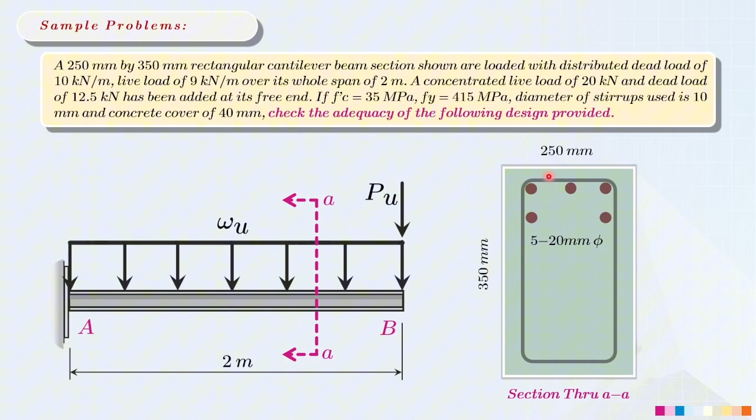First, let's look at the geometry of our reinforcements. As you can see here, the arrangement for our reinforcement is at the top. Usually, from our previous sample problems, it's at the bottom, because we know that when we place loading on top of, say, a simply supported beam, at the midspan the top fiber experiences compression and the bottom experiences tension. So wherever the tension is, that's where our main reinforcement should be located. However, in this sample problem, the interpretation will be different since we are given a cantilever beam. Let me explain why it's at the top.

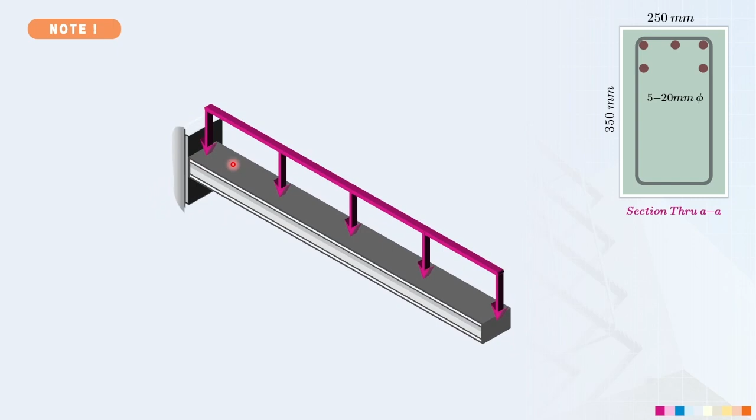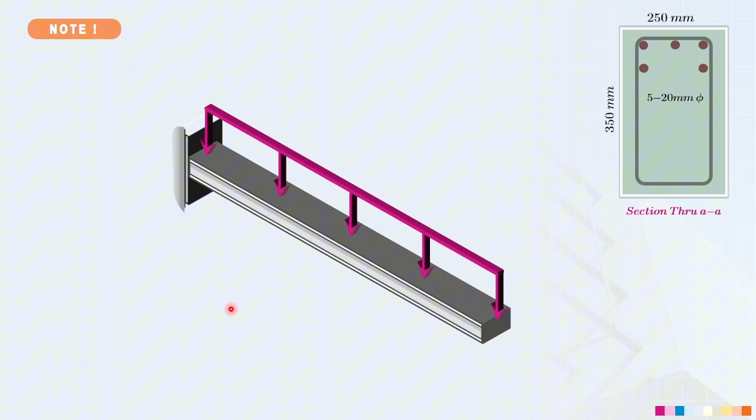Typically, when a cantilever beam is subjected to a uniform load or any kind of load, what happens is that its only support is a fixed support. This means in terms of deflection, it can bend downwards. If it bends downwards, the location of our two stresses, compression and tension, changes. Instead of tension being at the bottom, as typically seen in a simply supported beam, in a cantilever beam it's reversed. The tension is at the top. This means the top fiber is being stretched.

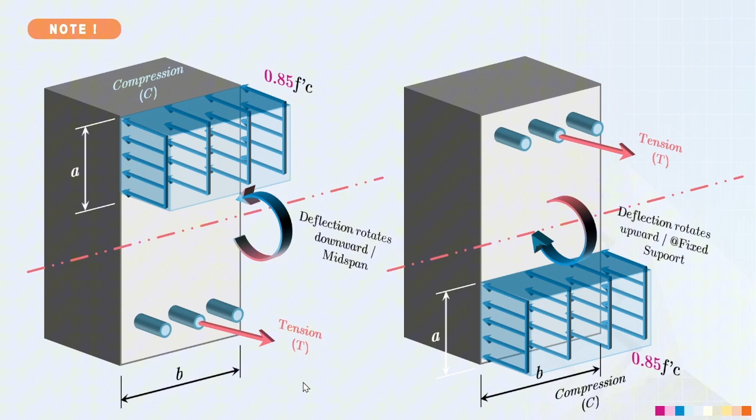Let's proceed with part 1, which is the beam section capacity. We need to get two moments here: the moment coming from the section and the moment coming from the beam. Let's go through the preliminary steps - same as before, we need to determine the effective depth. Since the arrangement of our reinforcement is not symmetrical, we can use Varignon's theorem. Using Varignon's theorem, it's the same principle, but our total number of reinforcements here is 5.

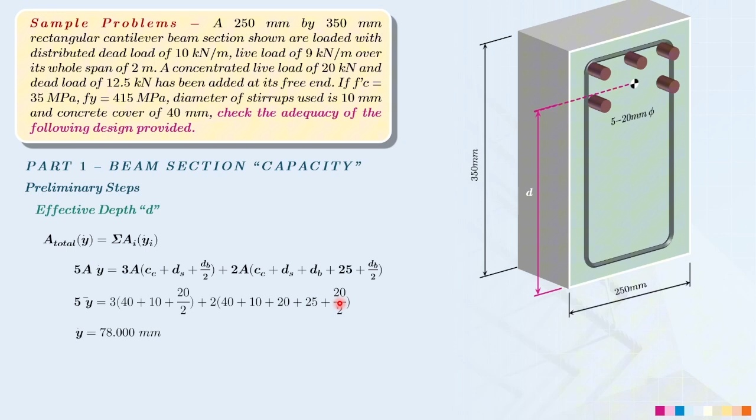So we get the location of the centroid for our main reinforcement as 78 millimeters. Subtracting from our 350 millimeters, the effective depth we get is 272 millimeters.

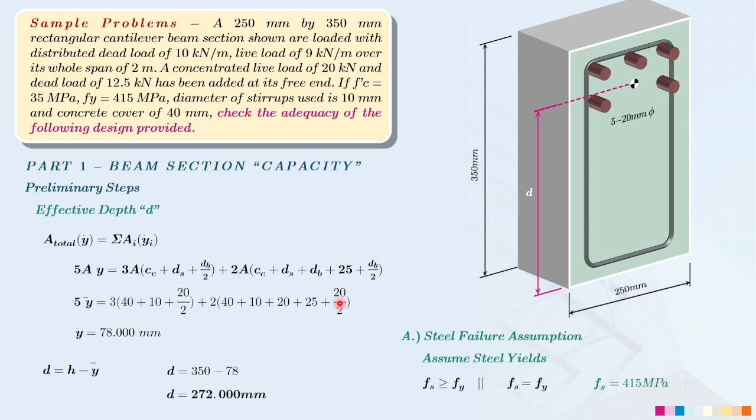So let's proceed with our first step. Our first step here is we need to assume the failure of our steel - assume that steel will yield. This means the stress of our steel is now equal to our yielding strength, which is equal to 415 megapascal. So emphasis here is on our stress diagram.

By determining our beta 1, or the stress block factor, since our f prime c is now equal to 35 megapascal, it falls under the second condition, where the value of f prime c is between 28 megapascal and 55 megapascal. So you will use this formula.

To determine our beta 1, we need to substitute f prime c as 35 megapascal in this formula. So this is 0.85 minus 0.05 multiplied by 35 minus 28 over 7. So our beta 1 is now equal to 0.8.

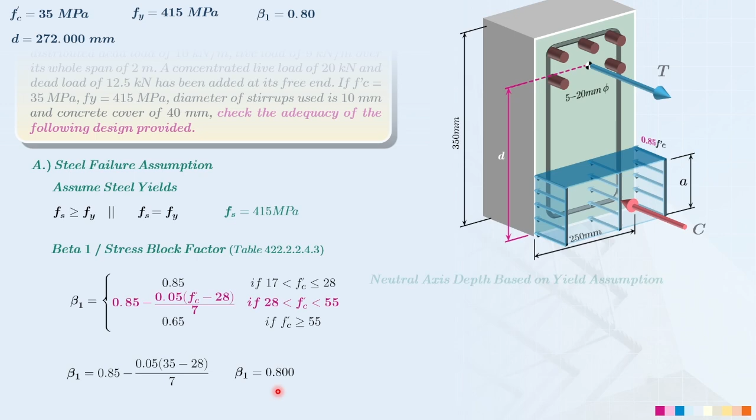Let's now determine the neutral axis depth based on our yield assumption, which is the emphasis of the equilibrium compatibility. Presenting here this equation, and also the formula for the depth of the rectangular stress block. Substitute back into our equilibrium compatibility and substitute all of the values. So the value for our neutral axis depth is now equal to 109.56 millimeters.

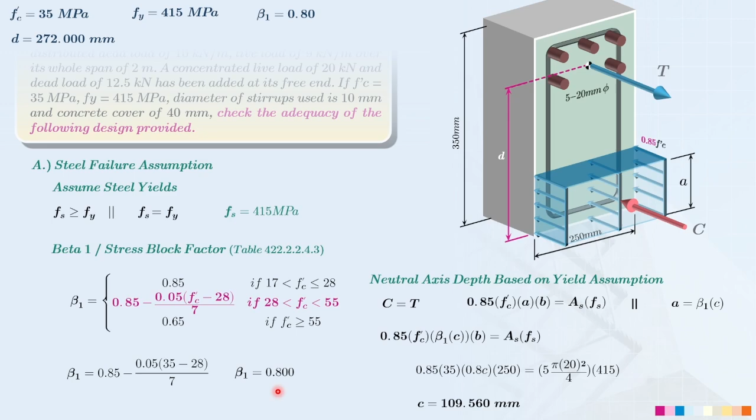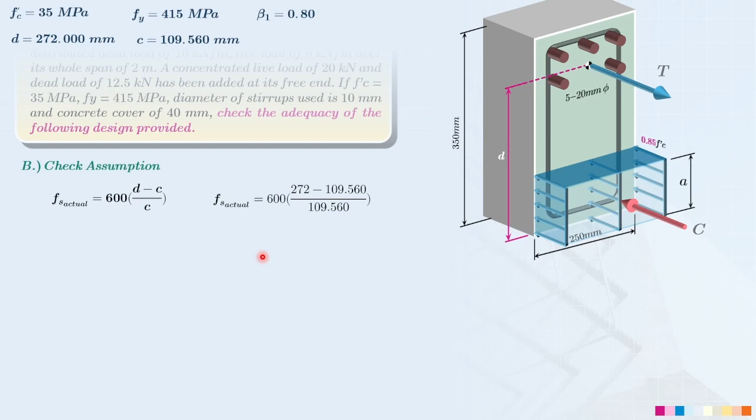Since we already got our value of c, we need to check our assumption - is it legitimate that our actual stress in steel did yield? Let's substitute according to this formula. So our value for the actual stress of our steel reinforcement is now 889.558 megapascal. Comparing with our yield strength, which is 415 megapascal, this concludes that steel yields.

So the next thing we need to do is determine the equivalent rectangular stress block using this formula. So our value of c, which is 109.56, multiplied by our beta 1, which is 0.8. So our depth of rectangular stress block is now equal to 87.648 millimeters.

After that, let's proceed to our third step, which is we need to determine the strength reduction factor, relying on our strain value. So I will divide the actual stress of steel, which is 889.558, by the modulus of elasticity of the steel, which is 200,000.

So the value of the strain is now 0.00445, which means this is between 0.002, which is the compression controlled, and the tension controlled strain of 0.005. This means, class, that this is now transition control. So, next step.

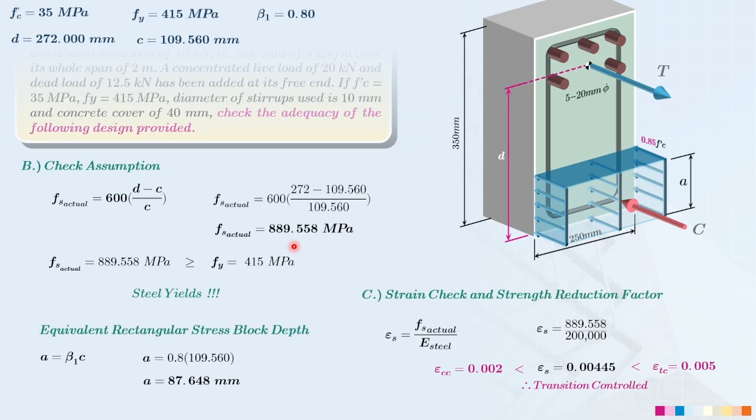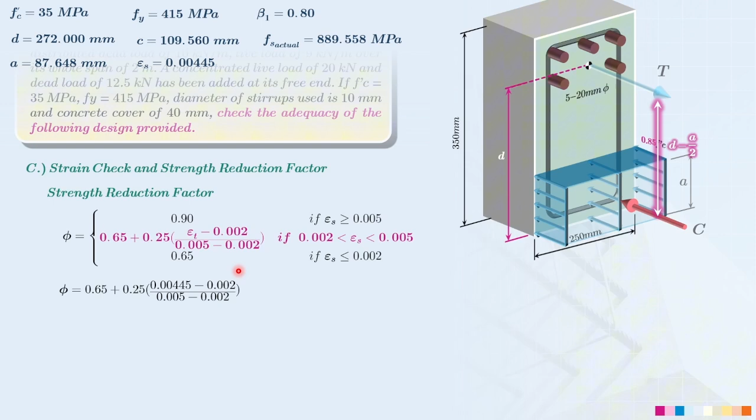To get the strength reduction factor, since it's under transition control, between 0.002 and 0.005, this is the equation we'll use. Let's substitute our strain: 0.65 plus 0.25 multiplied by the value we got earlier, 0.00445 minus 0.002, divided by 0.005 minus 0.002. So our strength reduction factor here is now 0.854.

So let's proceed with our flexural strength to get the ultimate strength. By the way, you can first determine the nominal strength. However, class, in comparing the adequacy between the beam section and the beam loading, the main comparison we use is the ultimate strength - not the nominal strength most of the time. Ultimate strength becomes the point of comparison here.

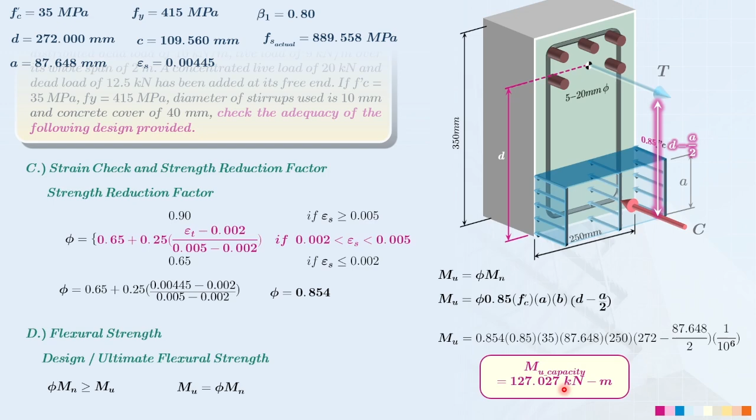we need to solve for the load demand. Of course, we need to determine the maximum moment from this beam. But before we can solve for the maximum moment, we need to determine the factored uniform load, since our load cases here are most likely dead load and live load, we can use 1.2 dead load and 1.6 live load.

So for our uniform load, this is now equal to 26.4 kilonewton per meter. So that's our uniform load.

For our concentrated load, which sits at the top, the formula is the same, just the variables change. So we have 1.2 multiplied by 12.5 plus 1.6 multiplied by 20. So our concentrated load at the free end is now equal to 47 kilonewtons.

Now, how do we know the ultimate load demand? We know that when dealing with a cantilever beam, the maximum moment is always at the fixed support. You can verify this using a moment diagram. But I'm telling you that when given a cantilever beam, the maximum moment always occurs at the fixed support.

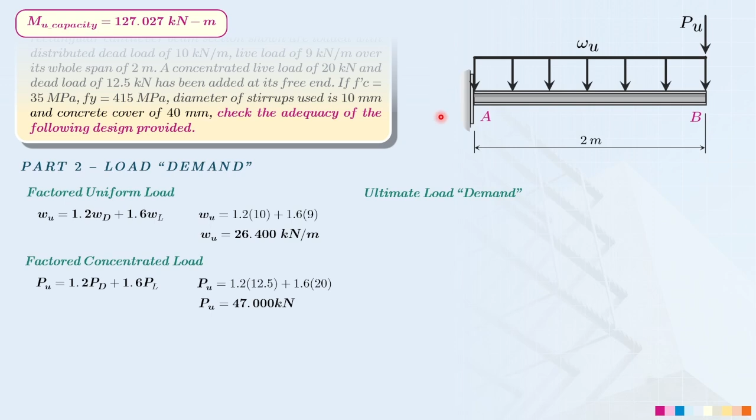So what I can do here is take the summation of moments. For my uniform load, it's the uniform load multiplied by the length, and its moment arm is half of the uniform distributed load length, which is L over 2. Then additionally, my concentrated load sits at the top of my free end, and since it rotates about the fixed end, its moment arm is the full length of the beam.

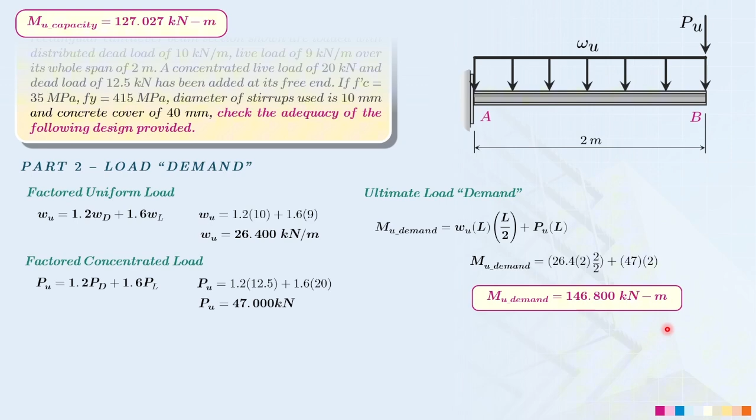So substitute all the given values here. The moment demand we get is equal to 146.8 kilonewton meter. This means this is the loading or moment demand on our beam, but you need to compare it with our section capacity.

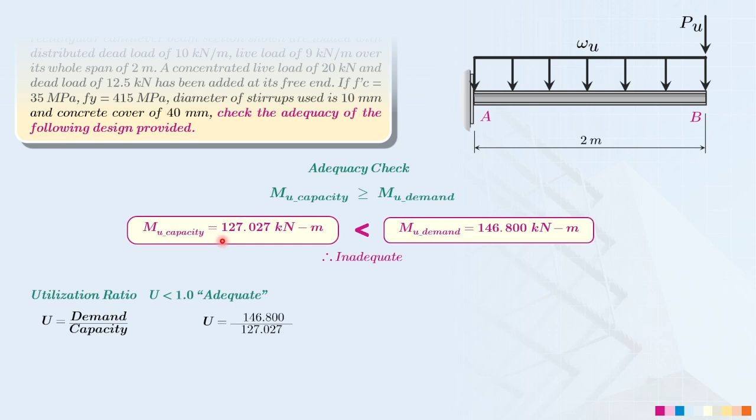So let's emphasize and substitute into this formula. Our demand here is the moment demand, which is 146.8, and our capacity here, coming from the beam section, is 127.027 kilonewton meter. Once we divide it, we get a utilization ratio of 1.156.

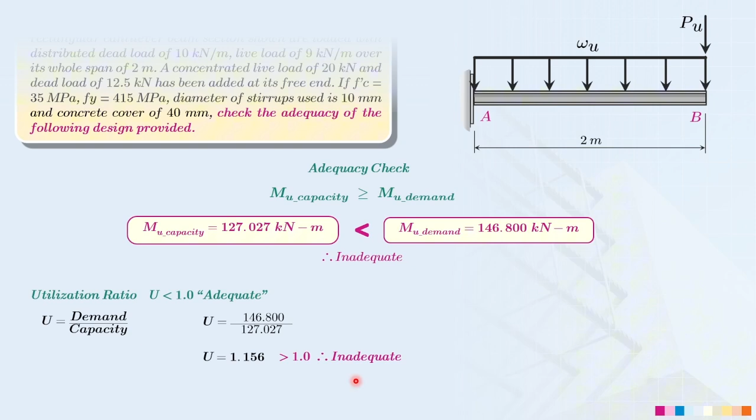By the way, this is unitless, since it's a ratio. So it turns out this is more than 1, meaning our interpretation here is inadequate. If less than 1, that means adequate, meaning our capacity can handle the demand loadings. And this concludes the variation of our analysis of singly reinforced beams.